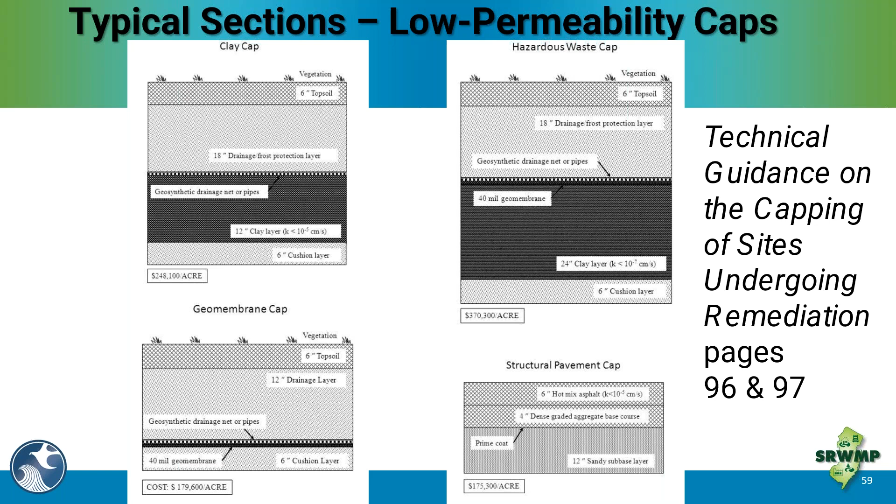So to get into some of the intricacies of what I would consider the more readily digestible guidance document, the capping for the semi-volatiles and inorganics. Pretty simple. Again, this document's a page and a half tops, but you're going to want to have groundwater below groundwater remediation standards. Under those conditions, you're going to need a minimum of 2 feet soil buffer above the seasonal high water table. You're going to need the contamination within that clean buffer zone to be below the MGW standards. This could be alternative remediation standards, certainly within your ability and latitude to do that.

Something also to keep in mind. At that juncture, groundwater monitoring would not be required because groundwater is not contaminated, and there is indeed the need for a soil RAP. And I'd be remiss if I didn't mention the need to address free and residual product. That should always be at the forefront. In instances where groundwater is above the groundwater remediation standards, periodic groundwater monitoring would be required as part of a groundwater monitoring plan, and you would want to simultaneously come in with a soil RAP and the groundwater RAP with a CEA.

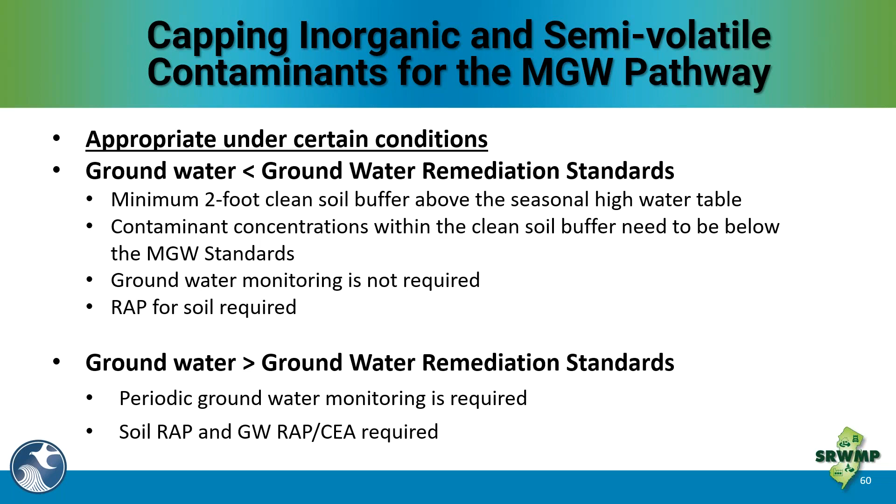And here's a little test your knowledge question. A landscape cap is appropriate to cap NJDEP exceedances for migration to groundwater exposure pathway exceedances. True or false? A, true. B, false. All right, so we'll give the folks on the webinar a few moments to answer that poll.

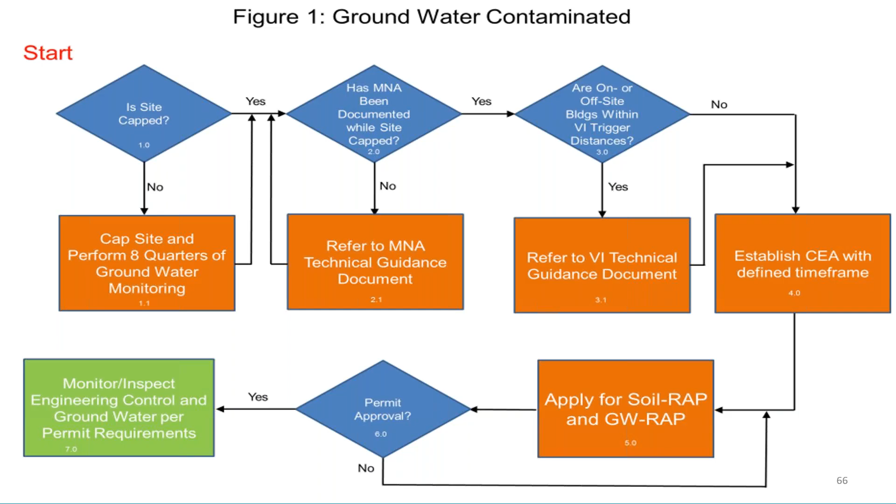So now let's move into the scenario that gets a little bit more tricky: when the vadose zone contamination has yet to reach the groundwater. Again, in theory, we've got to look at it from a different angle.

In this instance, we collect soil vapor samples, which is the same or synonymous with soil gas sampling as it relates to the field sampling procedures manual. However, what you compare those levels to is actually a table contained only within this guidance document, table 1, known as the impact to groundwater soil vapor screening levels. Depending on soil conditions at the site, if you are below that level, you should be able to apply for a RAP. But there are also different scenarios as it relates to soil type and distance from the water table and everything else of that nature, which gets pretty intense.

So that's kind of why that star is there, flagging guidance for these different scenarios. It's something that can't really be readily explained through such a short presentation today.

One thing people would probably be aware of, in that same vein as vapor intrusion, is that there's vertical separation distances, much like in the vapor intrusion guidance document, as it relates to benzene, toluene, ethyl benzene, and xylene. Those volatile petroleum hydrocarbons have different steps due to rapid degradation, and it may be easier if those are the only contaminants at your site. And again, as always, under 518 of the tech regs, free residual product, get rid of it.

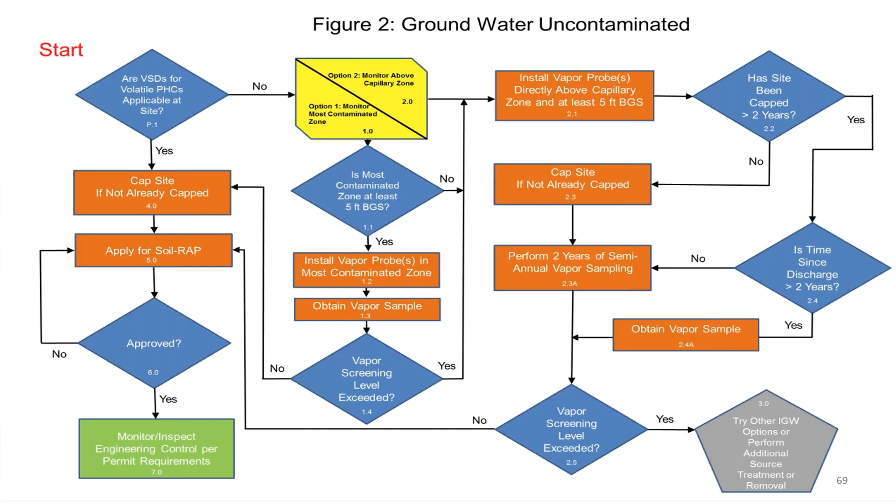As we wrap up here, no pun intended, some of the common RAP issues for volatiles are very similar to the semi-volatiles and inorganics - the cap's not right, among other things.

As you see in the flow chart, it's suggested or strongly advised that you come in with that groundwater RAP concurrently with the soil RAP. That's the best way to demonstrate that monitored natural attenuation is occurring. So as far as streamlining the process and making sure you get those permits, it would be in your best interest to do that.

If you are for some reason submitting a soil-only RAP, keep in mind that you are still going to be required to demonstrate that monitored natural attenuation is happening. So as much as one may argue that it's a final soil RAP and they don't need to include groundwater data, I'd say you're going to be wrong with that, because how are you going to demonstrate those multiple lines of evidence, more specifically that monitored natural attenuation is indeed occurring? Without that, you don't really have much.

And yeah, all the MNA requirements must be met - the site is capped, and again, there's decreasing trends.

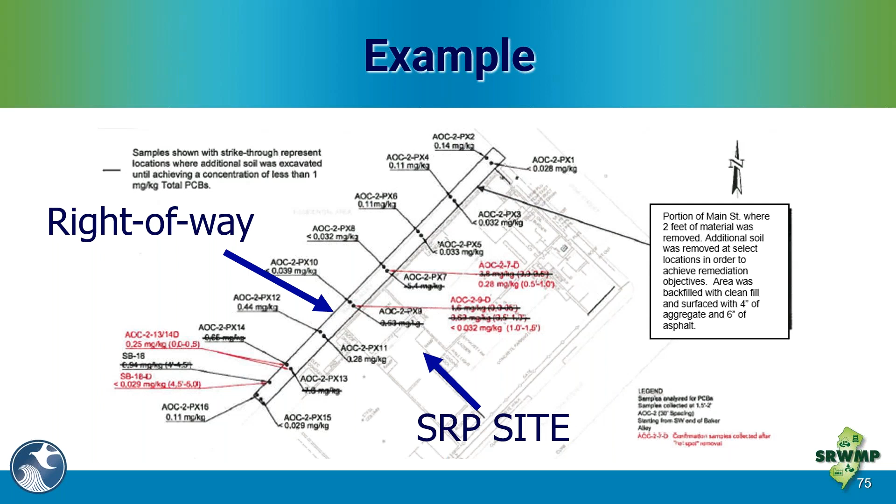So let's talk about the process. The key here is figuring out who the property owner of is that easement, sidewalk, the roadway. So there's two options here. Municipalities and counties, we have a formal resolution, and I will admit that this is a real resolution that was used at a town. So we did use real live examples for this document.

State and federal agencies, we have a model written agreement, and that's in Appendix 5. And I just want to really point out, and this is a lot of discussion about this, because when you're going to these agencies, they're not familiar with these documents.

And the key is the written agreement and the resolution. It says it right in there that the owner acknowledges that we are leaving contamination there, and that this signature on these documents will carry you through going forward, subsequent of any changes to your RAP permit or applications or modifications. So it's really key of this point in this document.

Also, we did the notice in lieu of a deed notice because you're supposed to take the model deed notice and then convert it into this notice in lieu that doesn't have a block and lot. Very confusing. We've got the template. And so it's really good that it's all in the document.

It's one-stop shop. Just want to point out that if there are significant changes, like if you are changing entire sections, you please need to call the DEP, the BRAP, because this is from the model deed notice and we tweaked it for the notice in lieu.

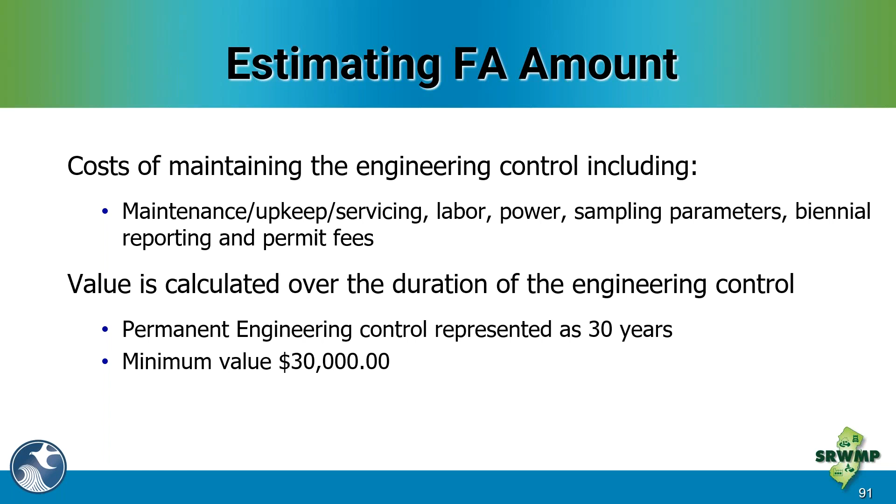For a soil permit, that would usually be a cap, and the cap would be considered a permanent remedy. So we'll consider 30 years as the duration. At a minimum estimate of about $1,000 a year, that makes the minimum value $30,000.

Okay, new in the guidance is a section on present value calculations. The amount posted for financial assurance may follow this formula. The amount you post is the amount you calculate for the FA divided by the discount rate to the 30th power. Okay, the discount rate is the actual interest rate you're obtaining, or if you can't come up with a number, then you use a published value.

The OMB Circular A-94 is a key source for this. Appendix C has a 30-year value. Right now it's 1.7%, but it is updated periodically.

Okay, in the guidance as an example, let's say you want to know the amount to be posted, and you say, well, I just have the minimum here, $30,000, and the applicant wants to use a trust fund. So you call the trustee and say, what's the interest rate that you're giving on these type of accounts? And the trustee says, oh, it's 1.36%. Okay, so you put 1.36% in your calculation and come up with the answer. You would post $20,000 in your trust fund for your financial assurance.

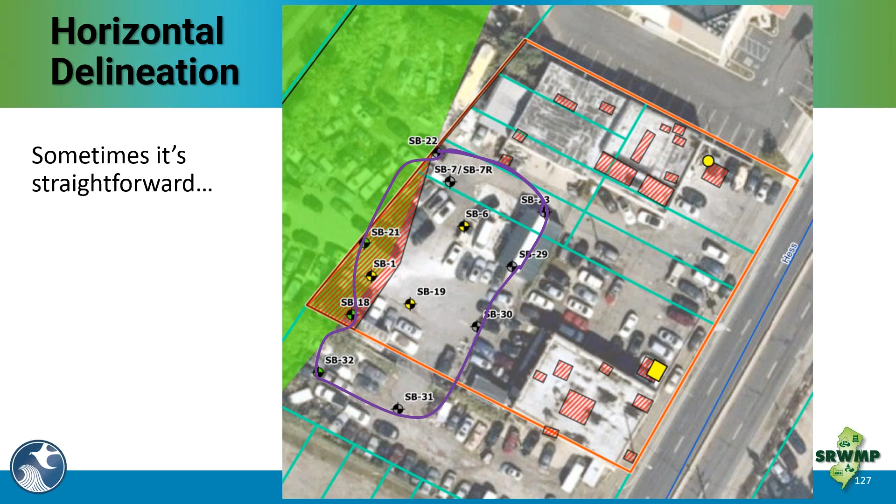All right, so this is pretty straightforward. Horizontal delineation. I've got my purple line. I'm pretty well delineated. It didn't take me too much effort. Sometimes you have to do 17 step outs to get to your delineation point, but still, not too bad. But then sometimes you just don't get there. And if you see question marks around the edges and you're not delineated, you are not ready for your remedial action permit. I could have just brought my purple lines around and said, I'm approximately delineated. You really need to button up those gaps there.

Mike's not persuaded. In this case, we have regional historic fill out there, and it covers the majority of my site. So if this is historic fill, do I have to delineate beyond my property boundary? No, thank you. All right, you guys are waking up. However, if my compounds, in this case lead and arsenic, can't be proven to be related to my historic fill, Mike Infanger, do I still have to go off site? If it's a site-related discharge, yes. Mike tells me this all the time. If it's a site-specific one, you have to go off site.

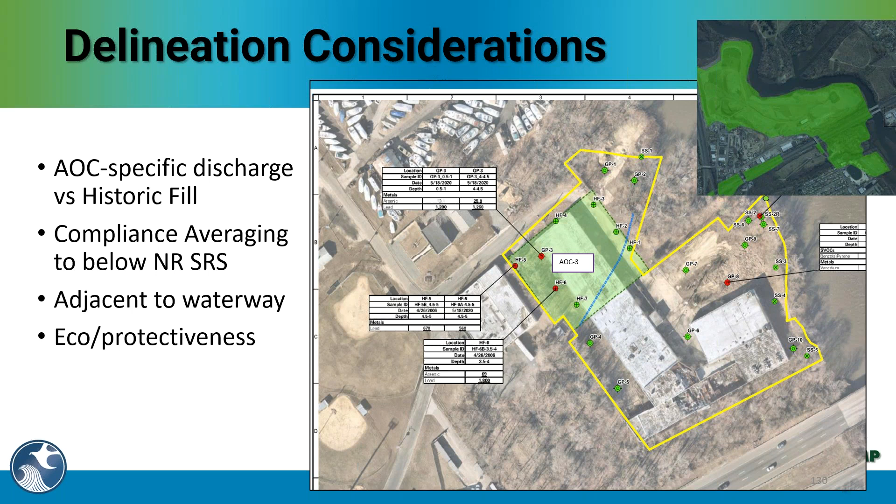So where do we catch that? That can get caught in the soil permit. So our soil permit here is going to say, I need my deed notice, but we're going to do inspections along the shoreline to make sure the vegetation remains there. So remember that. I'm going to show you an example of section K later where we talk through this one. All right, you with me? Make sense?

All right. So we were talking pretty much horizontal delineation there. Nobody brought up vertical delineation. We should have gotten vertical delineation in the first one. With this one, I just want to impress upon the idea of having your multiple lines of evidence and really understanding your site conceptual model. In this particular one, I have 2 different plumes and 2 different water-bearing zones.

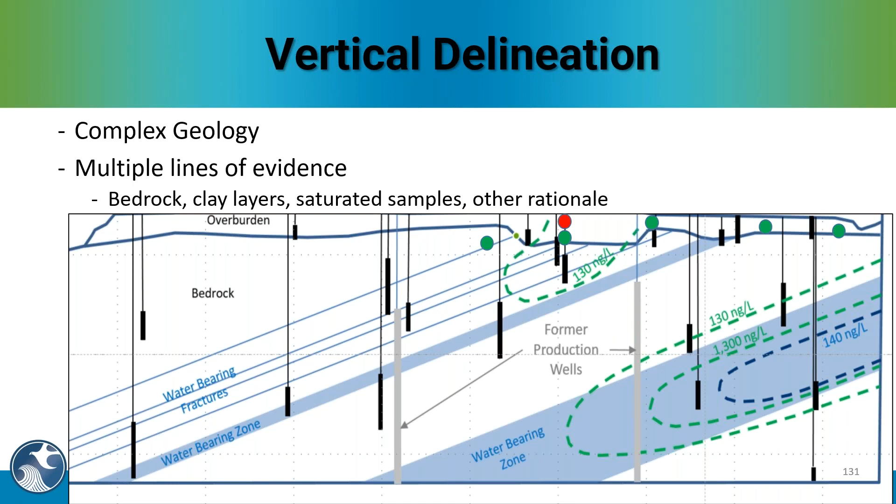And my red dot to show me that I have a soil exceedance in the unsaturated zone only tells me so much. Okay, maybe I have a discharge there. In this case, it was a point discharge. But if I'm trying to figure out why my groundwater concentrations are an exceedance in a deeper water-bearing zone, that particular point's not going to tell me much. So make sure you have a very robust, comprehensive site conceptual model. All right.

But I'll tell you that my soil sample along the edge of it was super close to the standard. The standard was 1, I was at 1.6. I couldn't quite round down. What can I do? Nobody? We go out, give up? Somebody said variance out here.

I'm going to tell the department that I have delineation, you know, most of the way around that circle, and my point right in the middle adjacent to the parkway was only 0.6 above the standard. I'm going to tell them it's less than an order of magnitude. I'm going to tell them I cleaned everything up. I'm going to tell them that it's unsafe for me to go drill a soil sample in the middle of the parkway. I'm going to tell them it's low occupancy.

Nobody's going to be exposed to that. And that road's a pretty good cap, right? Nobody's going to be exposed to that. So basically, I'm putting my lines of evidence together. I'm not just going to say, sorry, permit group, I'm done. I just couldn't get that sample. So, Raina, is there something else I need here?

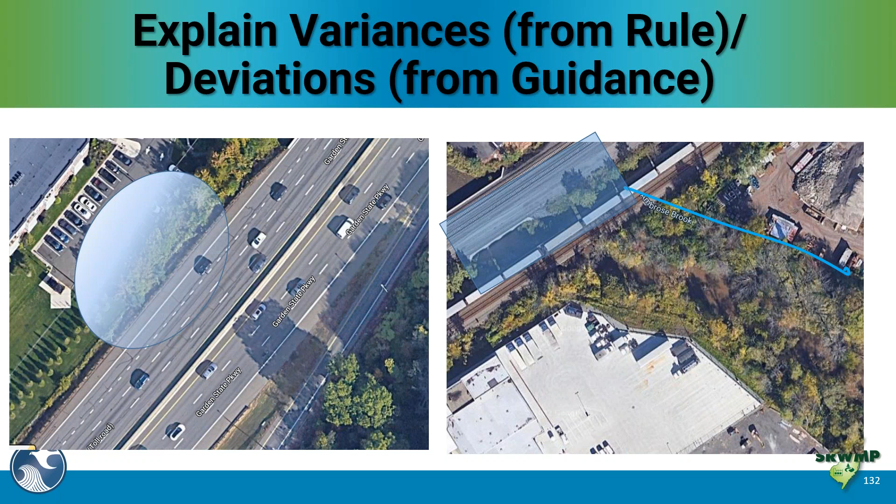If my soil is really shallow, it's probably not going to go across the stream and show up on the other side. But if it's a deeper sample, it might be able to migrate under the stream bed. So again, very robust site conceptual model. Doesn't help me that my site is bounded by train tracks either. So that's a whole other example there.

All right, so let's talk about the actual engineering controls and institutional controls themselves. Number one thing, are we protective? Is this doing its job? You're going to ask yourself, does a presumptive remedy apply? When does a presumptive remedy apply? Answers on the board. Anybody? Yep, schools, childcares, and residences.

If I don't have that for my site, can I still put in a presumptive remedy? Sure, why not? That's a pretty good place to start thinking about it, right? And if I put in a presumptive remedy, chances are, Mike, you're not going to really question me much. I met the presumptive guidance, even though it's a business. You're probably going to be okay with that. I'm hoping.

But then we have to talk about the intended use as well. My cap might be different if I am on a walkway for a park versus a big trucking facility. And I'm an LSRP, I'm a geologist, I'm not an engineer. So I'm going to go to my fellow engineers and say, when you design this building, this pavement, please convince me that it's going to withstand the truck traffic. And I'm going to work that balance between what was installed, is it engineered correctly, and if I feel there are some weaknesses in it, have a more robust monitoring schedule to make sure I'm inspecting it enough.

This is new in the form, and we talked about this for well over a month, I think. The forms now say that if you have less than 8 inches of hardscape and subbase in total, you need to provide justification of why you're doing 8 inches or less. That doesn't mean you can't. That doesn't mean it's not appropriate. You just have to explain to the department why you would be doing less than that.

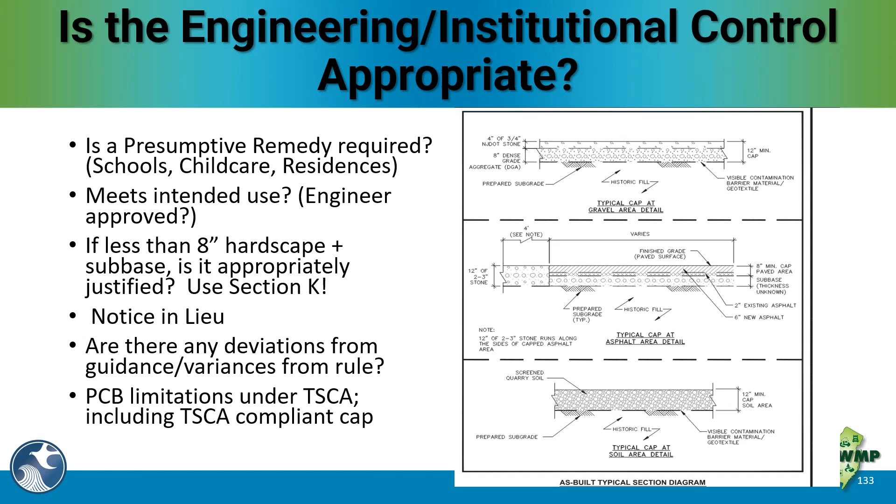I don't necessarily want to knock down these trees, so I'm going to put my lines of evidence together. I've done a very thorough PA. There's never been any operations on the site there. It's never been developed. I walked through. I saw no signs of stressed vegetation. But I don't want to cap it. These are nice trees. Nobody's getting there.

So I'm going to say to the department that its access is very limited. Nobody's coming in on boats. Nobody can get to the majority of the site because there's a drainage ditch there. There's actually a main utility line running right next to the property, so most people are trying to stay away from that utility line anyway. And because of that, I'm going to say the vegetation's significant enough to keep that in place, and the vegetation works as my cap. And we have some fence and signage there. So hopefully that's good enough.

But where am I going to document all my lines of reasoning? Two places: Section K and in my RAP itself. Yep, very good. All right. So we've done our thinking, we've done our delineation, we've done our conceptual model, we've walked through all our lines of evidence. So now we have to do the administrative and pulling together what everybody said earlier. Are your bills paid? Is your FA in place? Is your LSRP still retained? You need your LSRP.

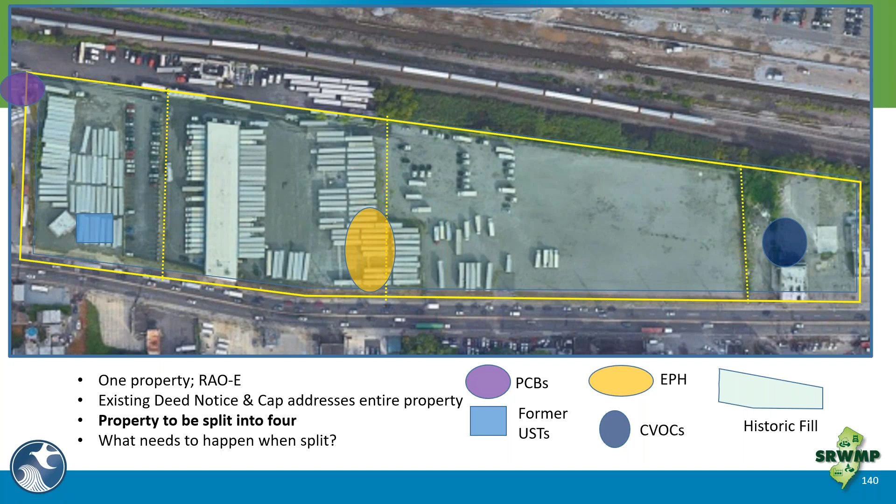So I'm going to wrap this up and just talk real quickly in the other direction. If we were to take those 4 properties and combine them, there's probably some efficiencies of scale we can do here. We still have to address, now we have 1 owner, we can probably get 1 permit. And I'm going to think about things I can do to make it easier for myself as things are being developed. Can I move historic fill across parcel lines if it's one lot, one block, one owner, and try and simplify things as I move forward.

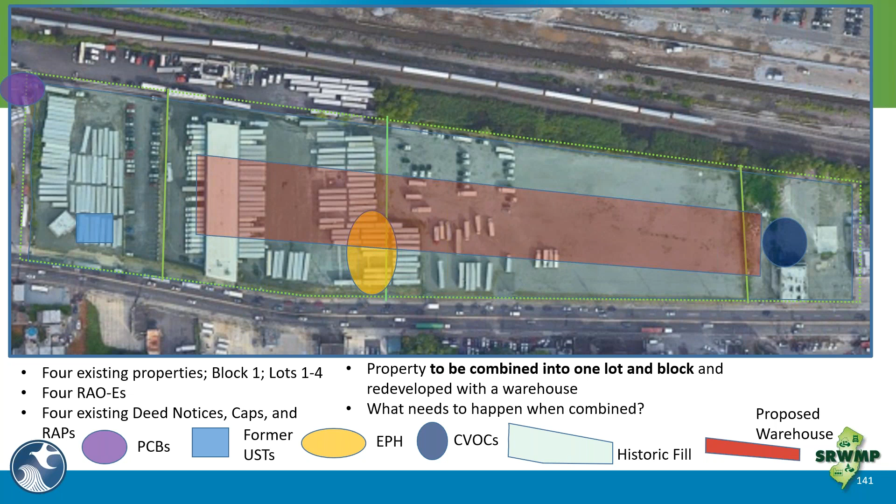So, all right, I could have spent another 10 minutes on that one, but I'll go ahead and move along. Thank you for your help, everybody. Good job. Thank you, Karen.

We know those dialogues are certainly helpful, and unfortunately, we don't have limitless time today.

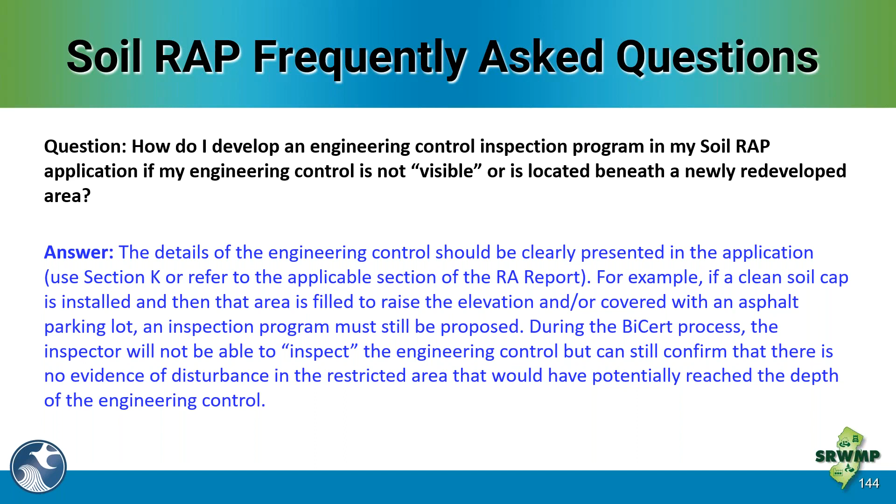But one of the things you need to keep in mind as a practitioner or an LSRP is that there are a lot of steps that lead up to getting you ready for the permit application. We heard today about getting a deed notice, God forbid you have to have a deed notice in lieu. You need to factor all those things in so you can make the timing work out. In the event that, for whatever reason, that doesn't happen, it's best to be communicating with the department. I submitted the RA report, my permit's not coming in for another 3 months because whatever reason, I can't get it signed, I'm working on it, it's coming in. It's a good idea to reach out, even if it's just through an email, to reach out to the BRAP group and say, hey, this is out there. It's best to sort of play a little CYA on this type of stuff.